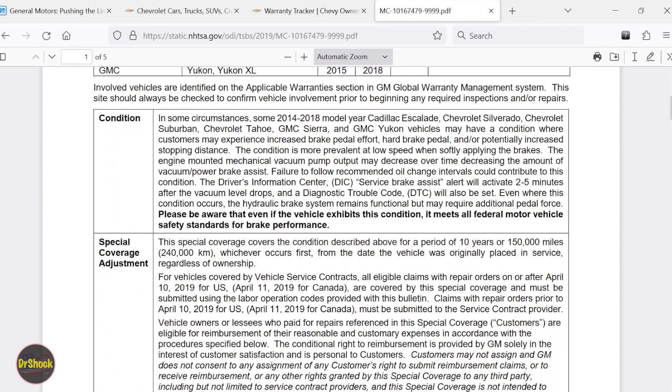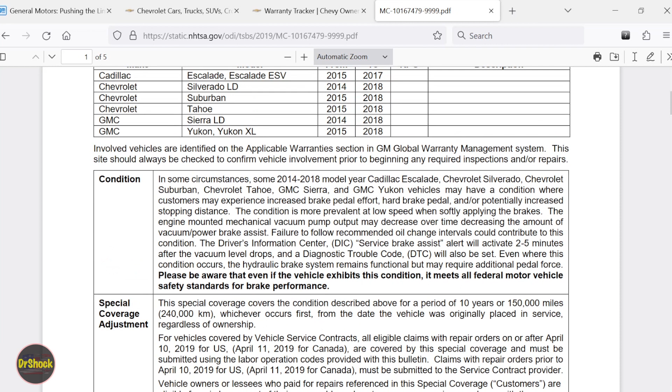Bottom line is, given this particular condition, what GM decided to do is for 10 years or 150,000 miles, they would cover servicing this particular problem past the regular warranty. So that's the idea of these special coverage adjustments - it's an adjustment to the warranty on the vehicle.

If we take a look and go back and see what this other one was, up higher, this guy right here, we'll copy him over and put him into Google or any search engine that you're using. And we'll see that this guy comes up as well. Again, National Highway Traffic and Safety Administration has a log of all of these.

We can see here that this one looks like maybe a scan of something - here's a special coverage of the seatbelt anchor pretensioner cable. And this is basically saying that there's a number of vehicles involved with this.

They sent a mail out to people and let them know that the warranty on this has been updated to June 30th, 2020 or sooner, right? So this is, again, another example of something that you can get.

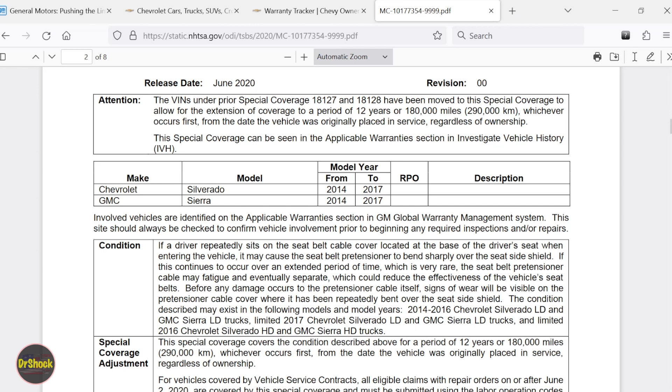Here's some more detail later on that. It tells you what the problem is, about the seatbelt cover at the base of the driver's seat, and basically 12 years - starting when they first put this out in that 2020 timeframe, June 2nd, 2020, they're giving you 12 years or 180,000 miles to get this problem corrected if you have it. And again, so that's this guy here, so that's why it says it expires in 2026 with this particular mileage.

Let's look at some of these other vehicles that we had in this sample garage. I'm going to go back to the main list here, and let's take a look at this old Cobalt.

So this one has coverage as well. Here we have a vehicle from 2009, and it still has coverage too. One that's out indefinitely, and one that's good until next year. Let's take a look at what this one is.

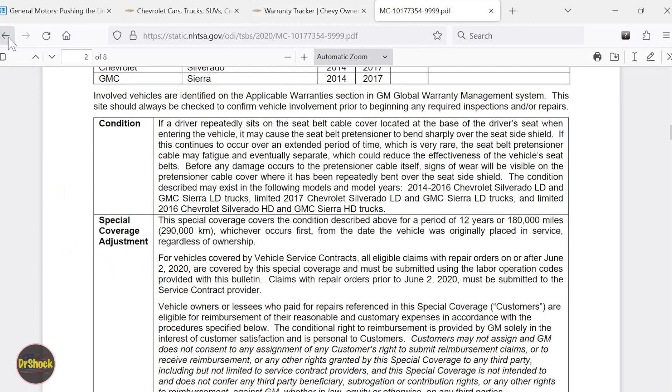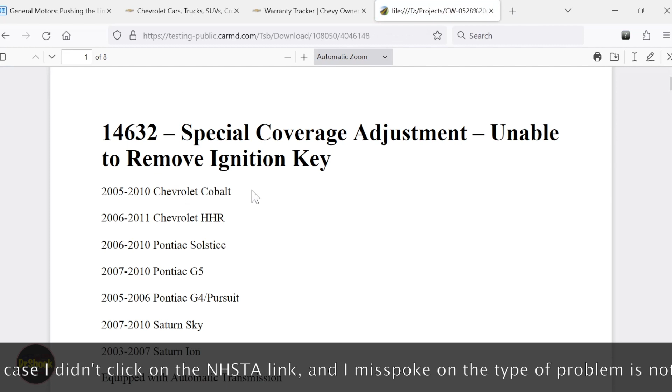So again, you can just copy that number, go back over to Google and plug that number in, and you can see what it is and find out if it applies to your vehicle. Now, this one's a very common one, right? This is an issue that occurred with a recall, actually, with the ignition key on these vehicles. There's still some people out there that may not have gotten that.

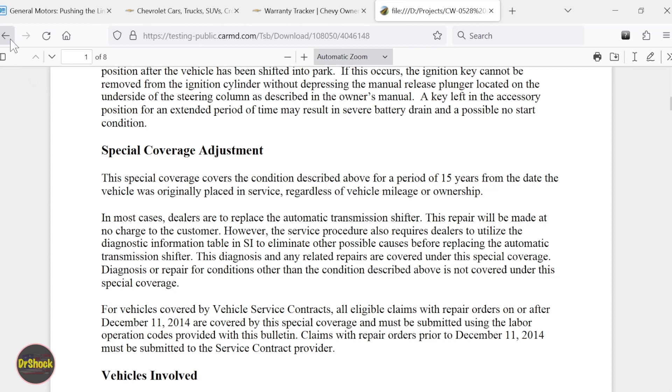So they've got 15 years from the date the vehicle was originally put in service, regardless of mileage or changes of ownership, to get this particular service work done for free. If we go back and take a look at the other one that was assigned to this particular vehicle up here that has an unlimited length of coverage, come down here and again plug this guy in.

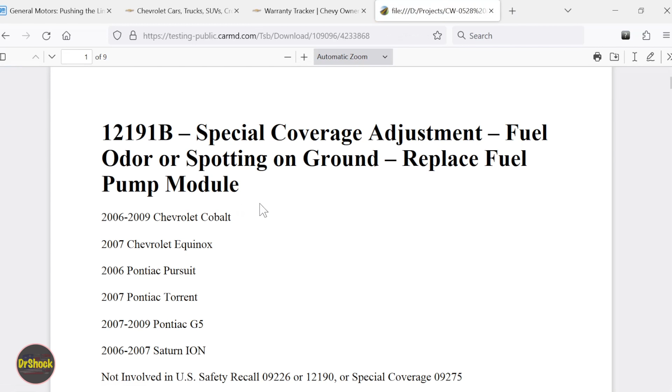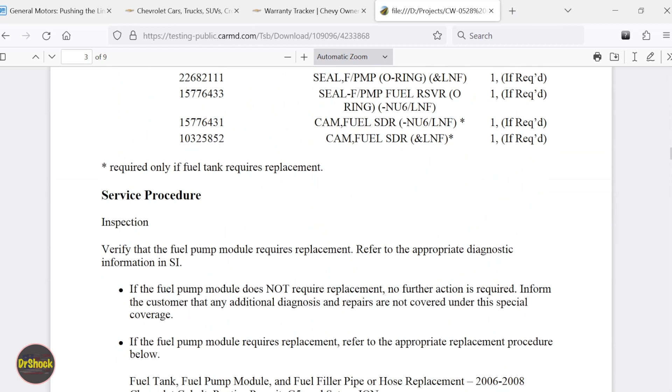We can see that this one has to do with a problem with fuel odors or fuel on the ground, and so it's an extended warranty on the fuel pump module. So they tell you what years this applies to, and let's see if they actually go down and give us a specific comment on the repair. Yes, they actually give you some information about the part number and the actual repair that's going to be done, the design change that was done for this particular item.

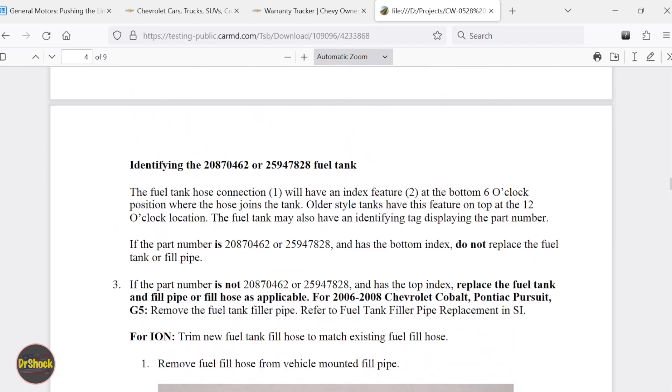But this one is rather unique in that there's no specific mileage or time duration before the owner can get it done. That's why if we go back over here, we can see that it's unlimited mileage and it's out in basically an infinite number of years, because you can take this in at any time. There's no expiration on this particular one.

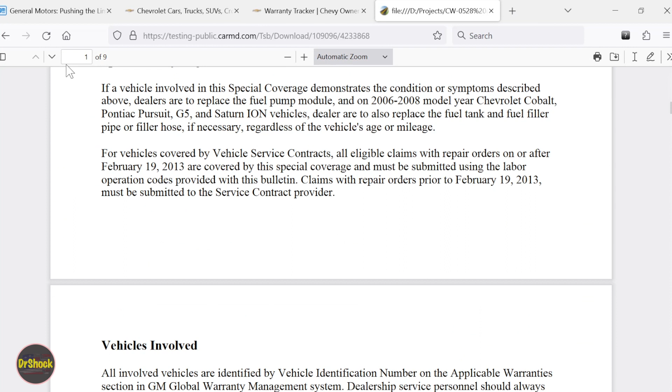And so similarly, I'll show you one more here. We'll go back and take a look at this Sonic. We'll see what he's got. He's got a couple as well. These are going to be expiring soon, but you guys are getting the gist of this. It's very simple to see what you've got and figure out whether it applies to you.

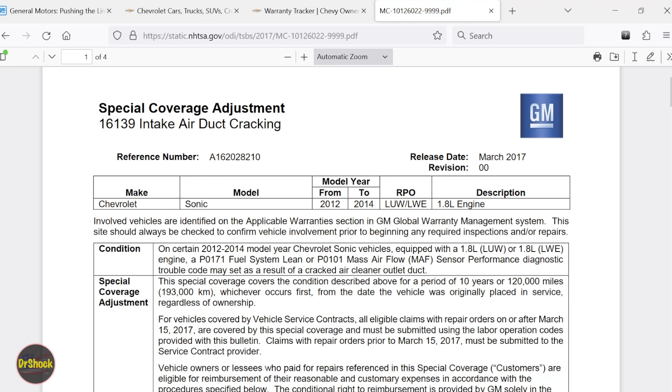So for this one, it says here that there's a problem on the Sonics with the 1.8 liter engine where the intake air duct is cracking. And so if you have that particular problem, then for 10 years or 120,000 miles, you have an extended warranty on that particular problem. So it's more and more of this ad nauseum. Rather than showing you other examples, I just showed you a few here.

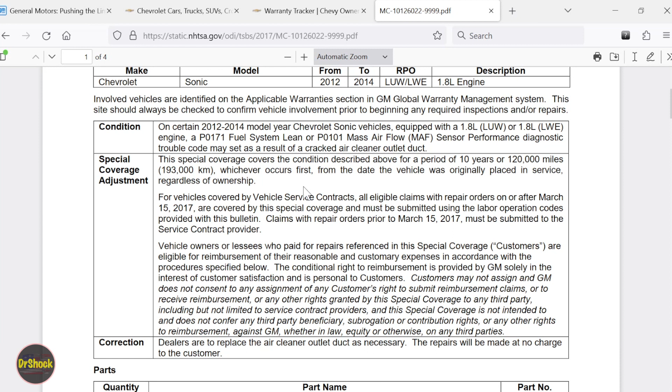If you go and create an owner account at gm.com on your particular brand, you get that VIN plugged in, you'll be able to access this kind of information and find out if there's been any sort of special coverage adjustment to the warranty on your GM vehicle.

I hope this information helps you out, saves you some money, maybe avoids you from having to pay an outside shop to do those repairs. You may be able to take it right back to your regular GM dealer, have it done with genuine GM parts at zero cost to you. So always check this if you have a particular problem to see if there's a chance it might be covered by one of these special coverage adjustment programs.